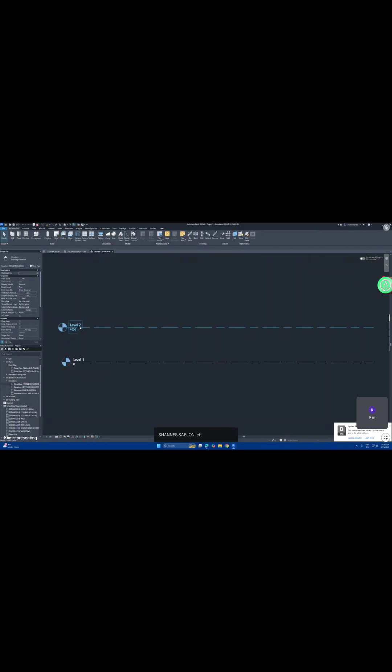Okay, so I will start with my plan. Sige lang, one story lang brown ta para dasig ah. Okay, so we'll start with my plan.

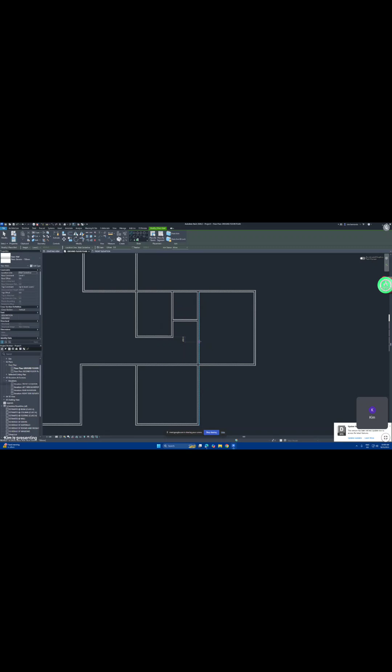Okay, so granting this is the plan. We are going to start the how to create your doors and windows schedule in Revit. You can use this one also when you import this in your AutoCAD project so that you will not draw it again.

This is the hard, tedious part in creating architectural drawings, especially the doors and window schedule, because you have to specify the sizes of your door, window jambs, door jambs, the location, and the location of your lock sets and your hinges.

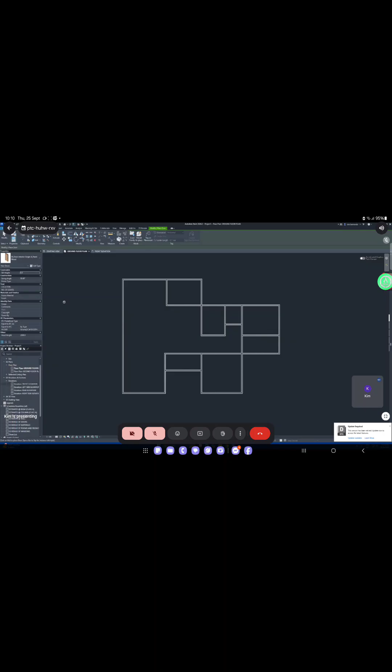So here in my practice, I always make it a point that we're going to start first with our doors. The main door should always be door one. So I have to duplicate this one and rename it properly as door one. Then check the height because the default height is wrong, so it must be 2.1 and the width will be 1 meter. Main door should always be 1 meter. Okay, apply, okay, then like this.

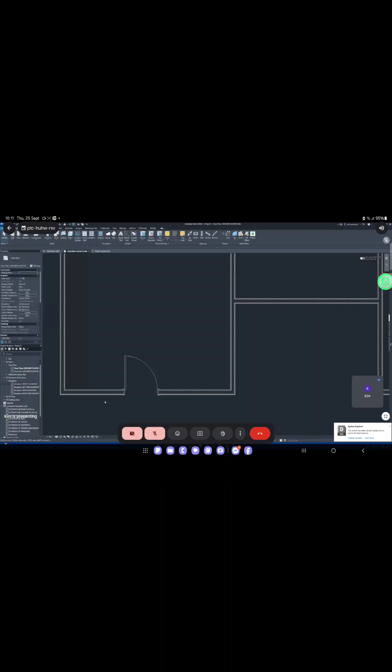Okay, then okay, fine. So that's the position there.

Sige lang. Then the next door will be the bedroom doors. So you have the door. So duplicate this one. For design, you can choose from the default design.

Edit type, duplicate this one. I will call this one D2. Then I will change this to 3 panels vertical. The width here will be 900, and the height will be 210 again. Okay, apply, okay. So that will be my bedrooms.

So that is my bedroom. Then next will be my exit, my toilet's door.

So for my toilet door again, you have to specify - duplicate D3. Then this one should be a single flush door, single flush.

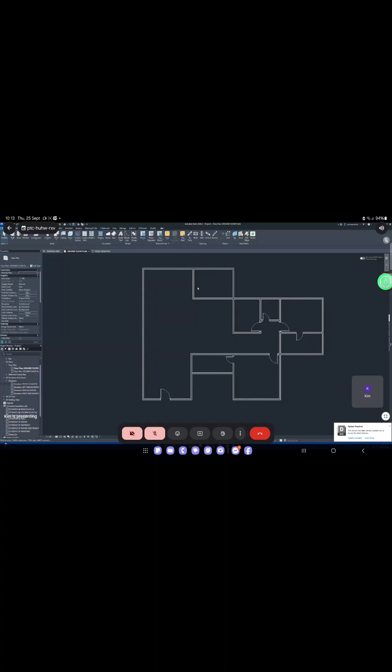So and the exit door, your - what we call this one - your exit door will be, anong exit door? Okay, so duplicate this one, door 4. Okay, exit. Okay, so exit door will be somewhere here.

Okay, that is our kitchen there. Okay.

So I will put the name now so it doesn't get confused. So the room here will be - sige lang. Then I'll put a room separator.

So this one will be kitchen. And this one will be pantry. This one will be dining. One will be living. This one will be T&B.

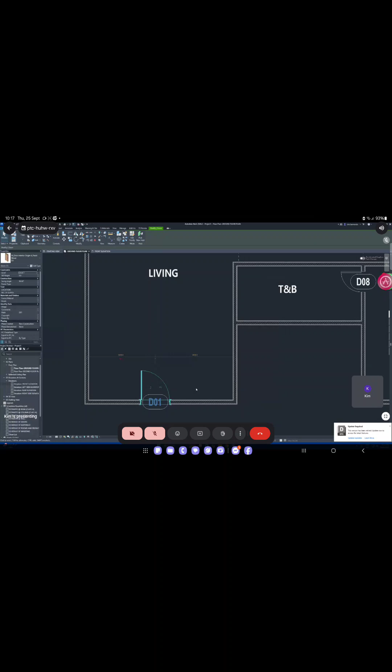Then here, you will notice this one. If I change this directly on the type mark here, I'll change this to D0... what is it? D0, what is it, 3?

Hello? Are you still with me? 3, sir. Okay, 3, check it. 3... okay, 3 it is. Sige na lang, 3. So here you have to change this one here.

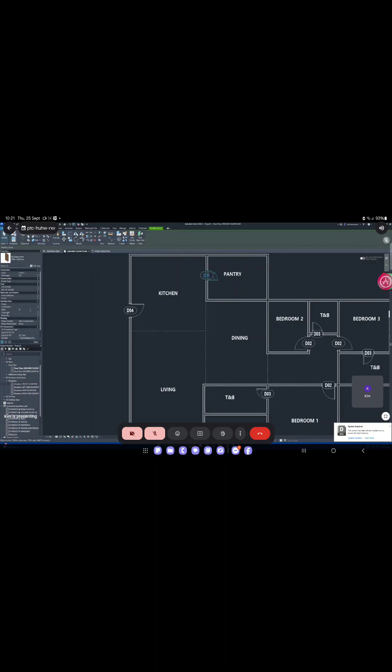So once you finish this one, sa doors, you can go here sa imong schedule. Okay, sa schedule mo diri. No? Since akin naka-template na nigali sa akon. So how to create new schedule?

So right-click this one, new schedule. On the new schedule, dire kakadto sa name sa multi-category schedule, you have to change this one to door schedule. Look for the door schedule. Door schedule. Okay? Door schedule automatic magwa. Then you have to go here. Okay, so you have to put here the fields sa schedule na needed mo. Okay? Since I have done that one already, I will teach you on how to do that one.

So wait anay, i-open ko ni siya. Door schedule, windows, doors, rooms. Ay, wala. Wala sa doors. Okay, sa door schedule, okay. Dapat amo ni sa magwa, no?

Take note what we're going to put. Ano na siyang iputang tada? Sa iya nga sa list, you have the mark, description, level, then you have the quantity, then you have the width and the height. Okay. So how to do that one?

How to do that one? So here again, schedule, new schedule. Then here you look for the door. Magwa na siya. Then click OK. Then on the parameters here, available fields and the schedule fields, you have to select first mark, no? Then this green arrow, masulod na siya. Then after that, you have the description.

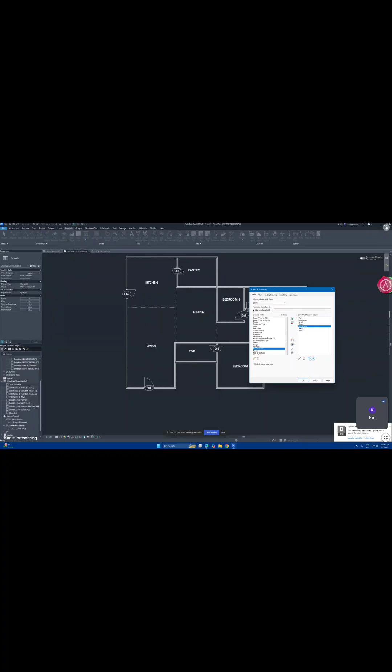So, we can change this one. So, i-caps lock mo lang siya level. Then this quantity, you count, you change this one to quantity. Pwede mo na sa pang-islan. Then this one, description. So, smart. Na-notice ni class, wala sa ano ni gani.

Naka-itemize siya. So, kadto ka di sa imo nga sorting, no? Sa sorting mo, i-uncheck mo ni si itemize, i-check mo si grand total, then you sort by mark. Okay? Ara na siya, tapos na.

Okay? Location, butang mo lang di, you can input directly. So, yung D1, din to si D1 kagina. D1 is located where? D1 is located in living, no? So, you just type here, living. Malabing naman. Okay? Then, description. Sa gold-plated door. Sorry. Wooden panel door. Mula na sa ginabutang.

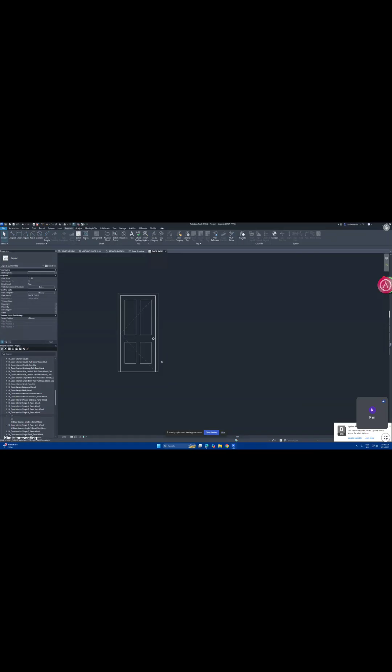D2, you just pick again, drop here. This is the plan view. Change the view direction to front elevation. So they're similar because they're the same style, but it differs in height - they don't align.

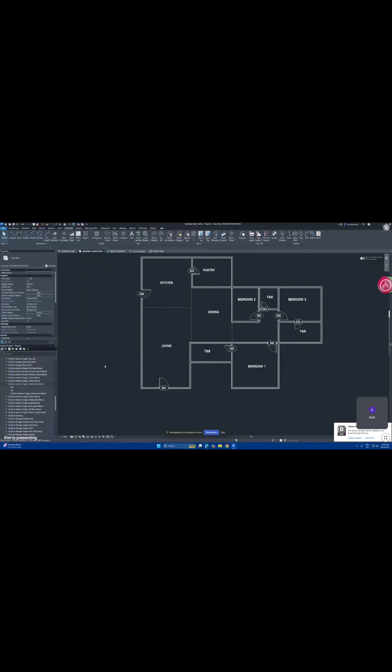D3 is PVC, D4 is the panel type - the hinge door. D4 is 3 panel vertical. Okay, 3 panel vertical, so that's correct. So this is all D4.

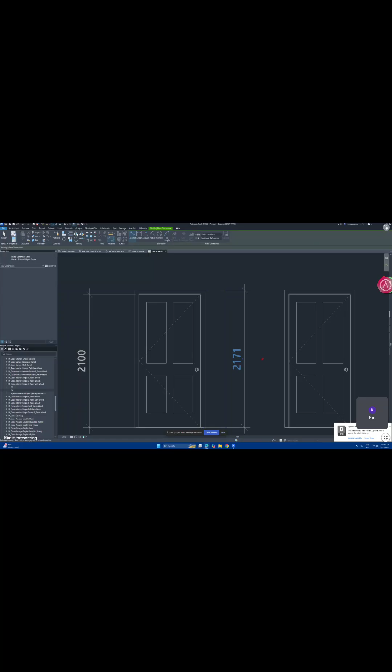Anybody? The left side, sir. So it's the 2100, right?

What dimension is this? Anybody? Go, try to understand how the dimension is placed. We have two dimensions, the 2100 and the 2171. What is correct? Both of them are correct.

2100 refers to what? Okay, so you know it's without the jamb. So what is it called without the jamb? It is the panel opening. Yes, it's just the door panel. The other one is the structural opening because it includes the jamb.

So be careful when you indicate that, because in the architectural plan, when you purchase your door, you're not buying one that includes the jamb. But on the construction site, you are giving the dimension of the structural opening that includes your door jambs. Follow?

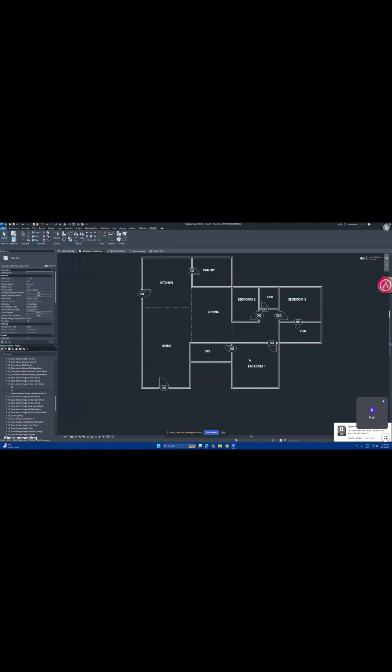Okay, our door 2 here, if we go back to door 2, we already edited it to 900 here that we specified, but they belong to the same family - door 3, which you have specified, is also door 2.

That one first. So that you won't get confused, because you have sizes given here, and given there. So what will you do here? You have to change this one, double-click this one, and replace it with...

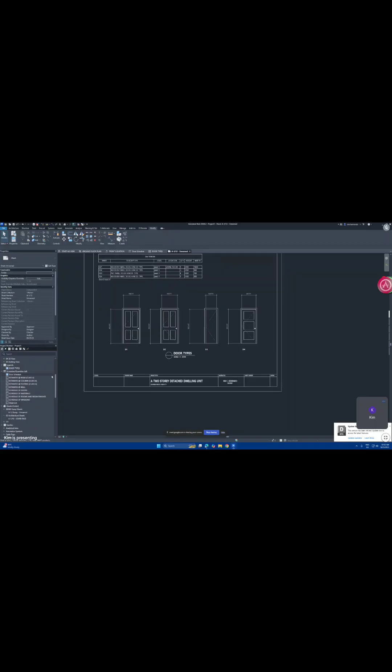So next, we have to go to our window. In the window class, it depends on you if you want to start with window number 1. In my practice, I always place my window 1 where I place door 1 so I don't get confused during my inspection or during my quantity take-off. Okay? So, window.

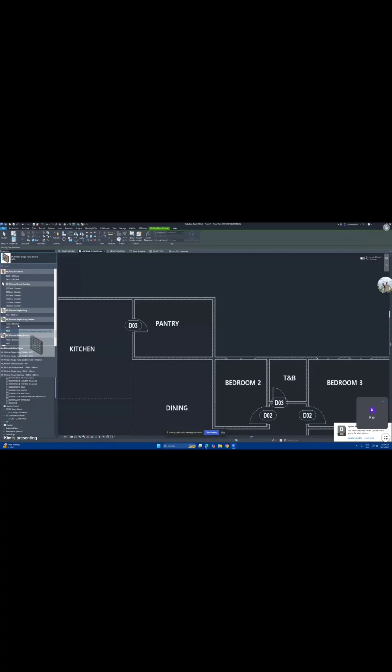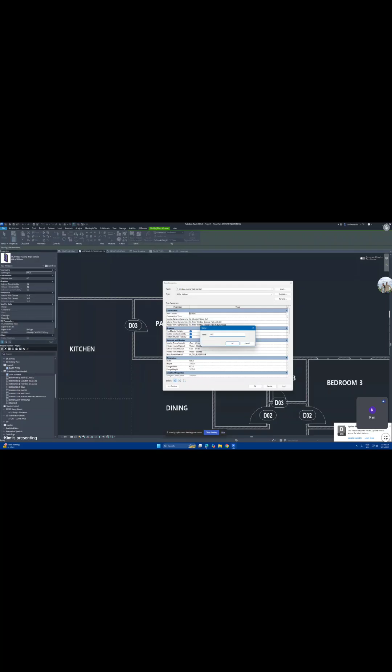Ano niya siya, door ano niya siya? Ano niya siya, window ano niya? 4? Sige lang, lipat ako. Window 4. Sakto, window 4, okay, so I'll just put it here.

Yun ito. Okay, so 900, dapat 900 mo lang siya para hindi ka magproblema. Okay, so baliskad, dapat parehas, sila sa sulod siya. Okay? Then on my kitchen, I will put here double casement or sliding na lang, no? So lain ang size niya, okay? Mataas sa diraya, so window.

So that will be... so this one, but I have to edit this one. I'll call this one, duplicate this one, Windows 05. Here, change this one to Windows 05, correct.

And the height here, so the height will be reduced. The height will be only 120. 90 plus 30 equals 120. 120 minus 30 equals 90. Okay.

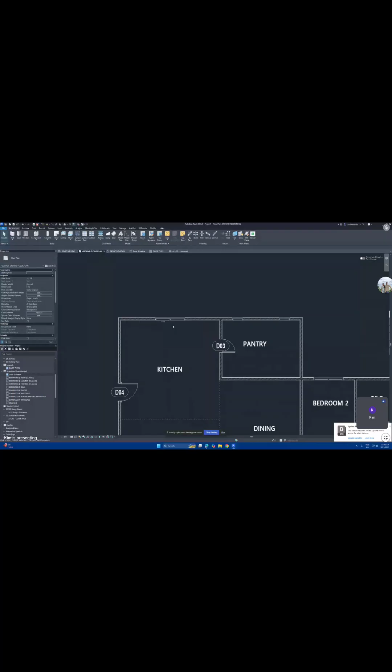Araang, lababo ko, diri nga lababo ko ha. Butang ko na lababo ko. Okay, then sa dining, I will use this one here sa dining ko. Ang window ko na ibutang is ang isa nibla ang labog ni. Hindi na ako triple rounding vertical na.

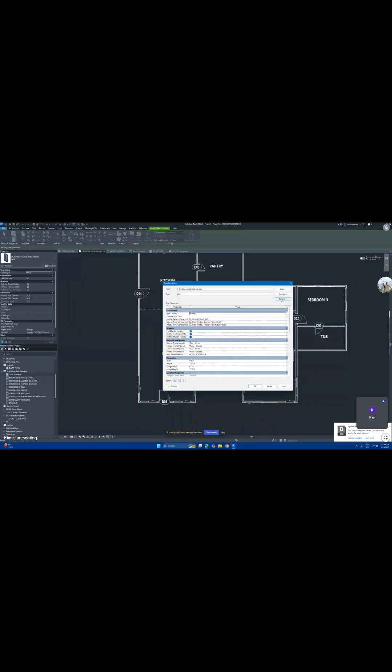Okay, but I will duplicate this one. I will make this one window 5, window 6, rename, duplicate, window 6. Then the width will be 600, mo ko sa 800. And the height, 120, sill height, pila ni? Window 6 sill height, go default sill height. So the sill height will be 450. So 900 plus 450, diri sa madugang na di siyang height ko, ma-plus 450 may mo sa 210.

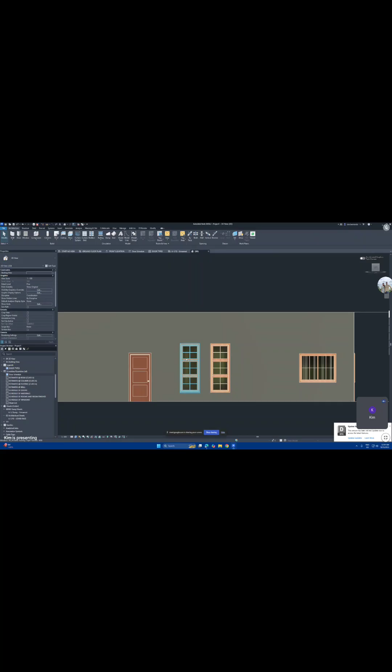Okay, apply, okay, then diri ni sa do kabilog. Okay, ang taon tabi itsura ya. So muna, okay? Mutas taas na sayaw, sobra ni sayaw, 210 haw. Ako sobra yaw. Tapos sill height.

I'll go to my initial elevation left. So I'll just madalas sa this align. Hindi sa madala. Move. Okay.

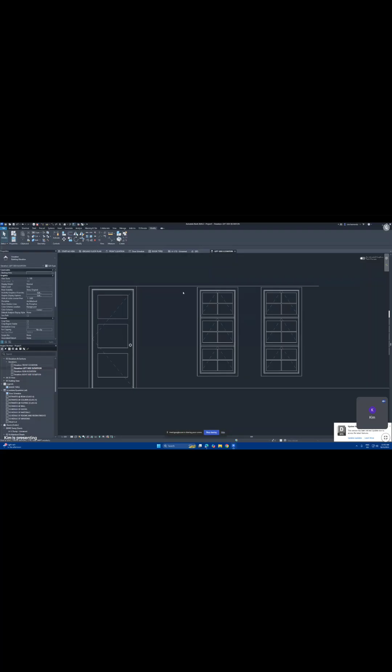So pila ng sill height is in it? So 324, I'll just call this one 300. Ano po siya, ilang gamay lang na, 300. So hindi siya makita, no? 1 inch lang diferensya, hindi makita. Okay?

So kung gusto mo gid, iparehasyon, nag-plus 300 kiti sa height, at 25, so 1825. Apply, okay, then DL. Okay, good, so yeah, align na siya. Muna klase, mag-align na, so we go back here. Next is, you have to label na.

Annotate, tag by category, so this one, window 1. Okay. Ay, wala na di bintana. Sige na lang, wala ano naman may bintana nila. Huwag tagali bintana sa toilet, no? Excited.

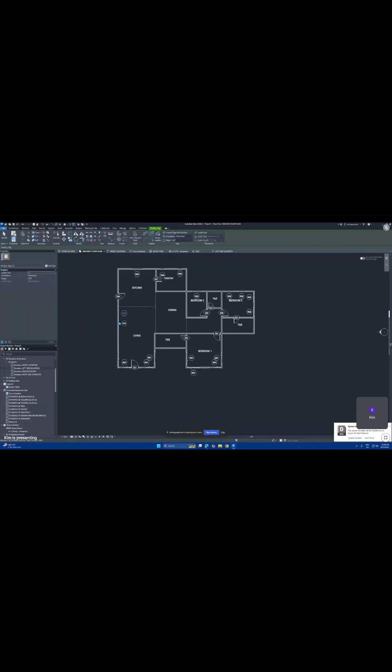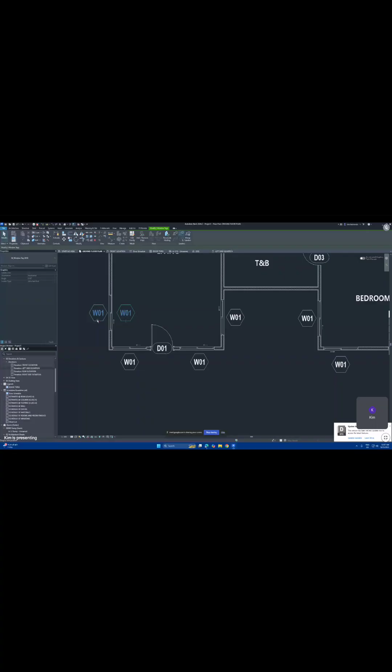So diin ang proper way, sagwa akong sa sulod. Ini din na butang sagwa akong sa sulod, dira na dapat ha. But again, it depends on the office kundi ng ila standard. Okay, wala tayong bintana, no? Sige lang, social naman ni butang tao ah.

Ang door, ano na siya? Door 3. Window 3, window 4. Window 4, i-duplicate na siya. Duplicate, may mo na siya. Windows 6 na siya, no? Windows 6 na, windows 6. May 6 na, windows 7.

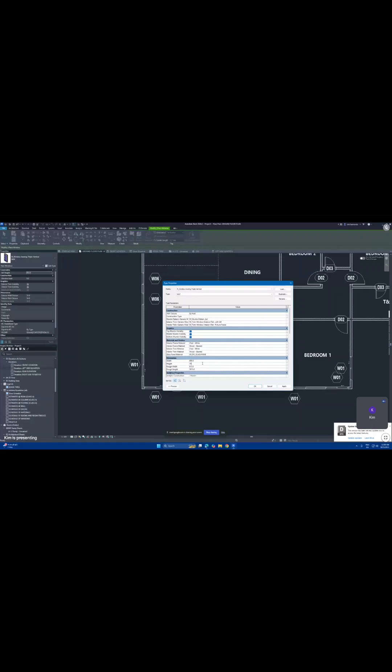The width will be 600. Sige, 600 lang, ang height ni 900 plus 150 na lang siya, 1,050. The sill height will be 1,200. Okay, apply, okay, so it is a bitaw.

Hindi siya tawa. Okay. Social ni siya nga bathroom, high window. Okay. So, tag by category, baliskad ni siya ha, sala niya. Windows 7.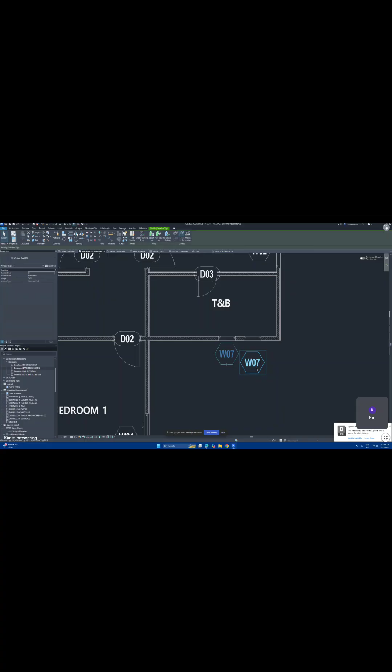Okay, pag-on na siya. Okay, so much for that, ha? Kamo na lang plus star. It's the same manner, man sa gyapon magobra. Ang problema lang dire, once you make a mistake sa window mo, because the same as door, the same sa door, ang gagawa ng number, magsulod ka sa iya is sequence. What do you mean by sequence? Ang time or the moment you put in the windows and doors sa imong drawing, nagadugang ng number niya.